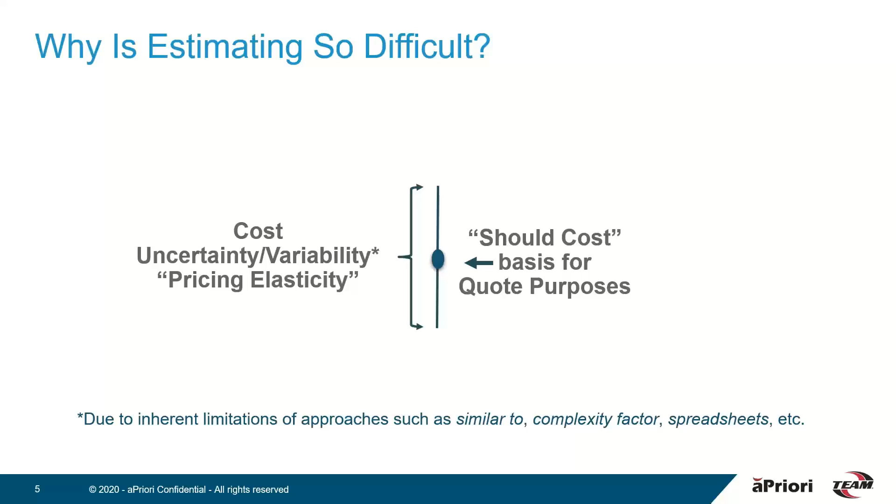So it leaves this band, if you will, of the range for an estimate. And there's a narrow window between pricing it and ending up in a situation where you're not profitable, or overpricing and not being competitive.

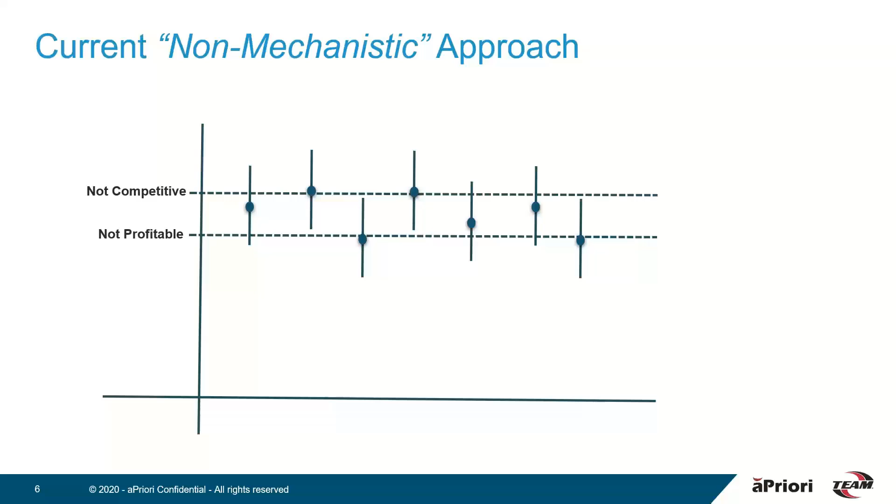You really want to be in that middle band where you're not overpricing and losing the business because somebody else is more competitive. So the reality is oftentimes many suppliers will err on the side of caution and go on the higher side in terms of their bids, to make sure the business they win, they'll actually achieve the margins with and won't lose any money on those.

Worst case scenario is that you're on the other side, and hopefully this doesn't happen often, but you're underpricing and not really fully understanding what you're getting into and what your costs will be, and you're pricing your projects too low. You might be winning the business, but it's bad business.

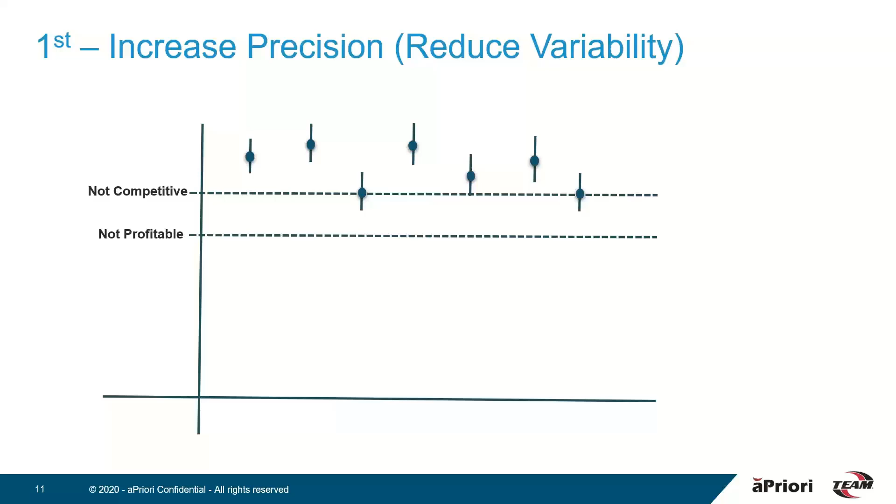So how can this be addressed? One of the things that can be done is to increase the precision, reduce the variability between the different estimators, and really narrow that band so that you can hone in on the right RFQ price. The next thing you can do is eliminate the variability and improve the consistency so that no matter who is doing the estimate, all of the manufacturing factors are being taken into consideration and the same results are generated from estimator to estimator.

And lastly, we can put this in the range where we're pricing at a competitive price, yet achieving the margin. We know that we're going to make the expected margin because we're pricing it in the right range here. So ultimately, we can get into a situation where we're bidding very competitively against the others that are available.

We're increasing our win rate because we're quicker. So if we employ a method of responding at a much greater speed, we can be first in and potentially win more business, especially with a competitive price, and make sure that we have a predictable and ultimately evolve the profit margin with competitive bid packages.

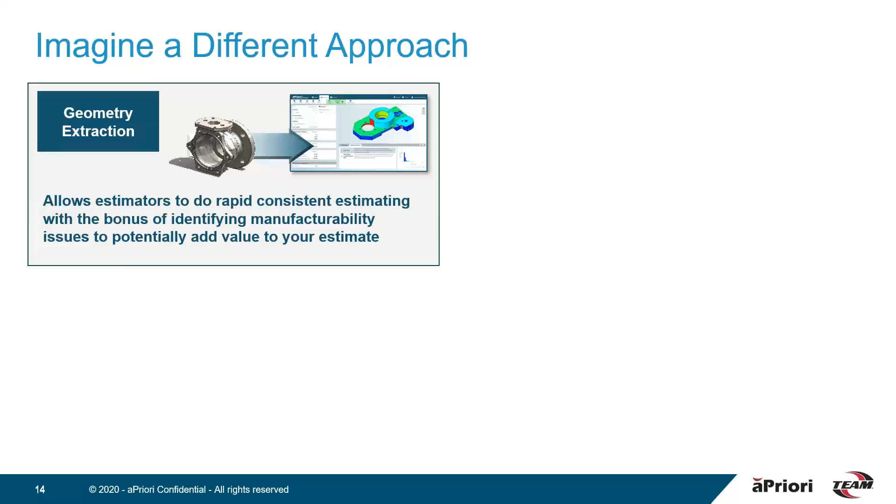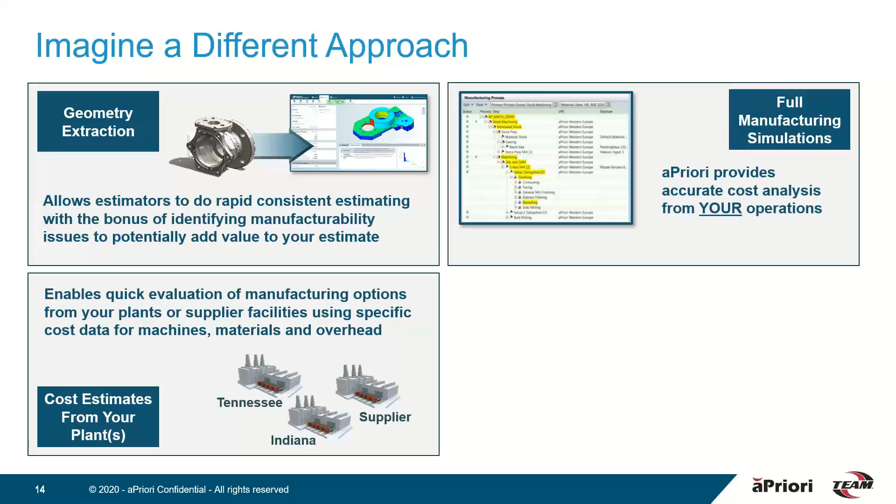So an approach to do this is what we'll review today, where we look at pulling information directly from the CAD models in the bid package to perform an estimate, understand the manufacturability requirements, and ultimately estimate the costs based on your digital factory and your operations and all of your factors that go into really pulling that together in a timely manner. Understanding your digital factory, the capabilities that you have, your specific materials, machines, and rates can all be factored in, and doing so in a collaborative way.

Making sure that everybody in the loop has the visibility to the different pieces that go into the overall RFQ and can contribute and ensure that everybody is on the same page. And this extends out to the customers themselves as well.

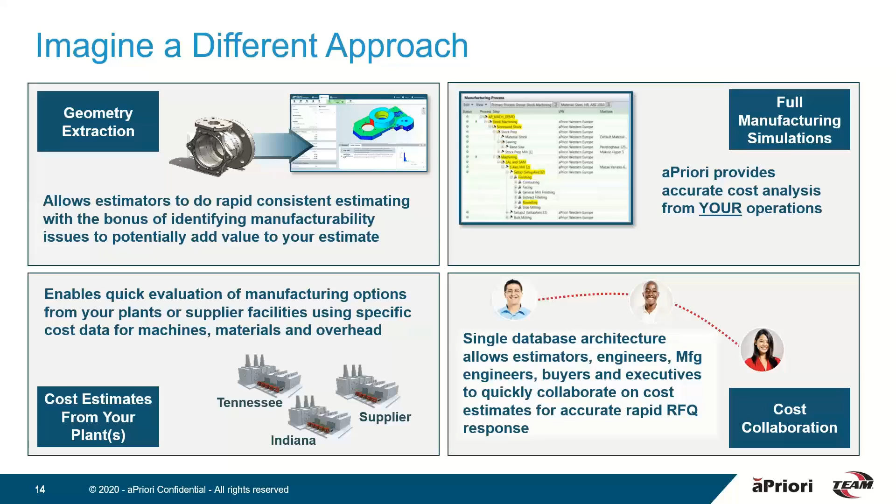So at this point, let's launch a poll and look at what percentage of incoming RFQs you choose not to bid, whether due to time and effort, capabilities, or even capacity.

Nick, do you want to talk a little bit about jobs that you potentially pass on? So every company, of course, does no-quote something. Typically, though, team vets our customers, and we develop deeper relationships with our customers. So by and large, if it's something that you need and you're a good customer, we try very, very hard to be a good supplier. So we'll give it our best shot to try to quote everything that you need. Some stuff we'll agree probably isn't a good fit, but we do our level best to provide solutions for you in every case.

And it looks like in many cases here, based on initial results, in 50% of the cases, 5 to 20% are not responded to. So it's pretty interesting.

So let's go ahead and move to taking a look at the solution. We'll run through an example here where we can look at quickly responding to a bid package and also introducing capabilities for collaboration. All right, so I'm going to log in to a cloud-based solution.

So the aPriori solution, which consists of a variety of role-based solutions to support the overall bidding process, manufacturing simulation, and costing effort. So we're going to start in aPriori Professional and take a look at this example of a TV mount. This is actually for a decent-sized 70-inch TV that a contract manufacturer is sending off to a supplier.

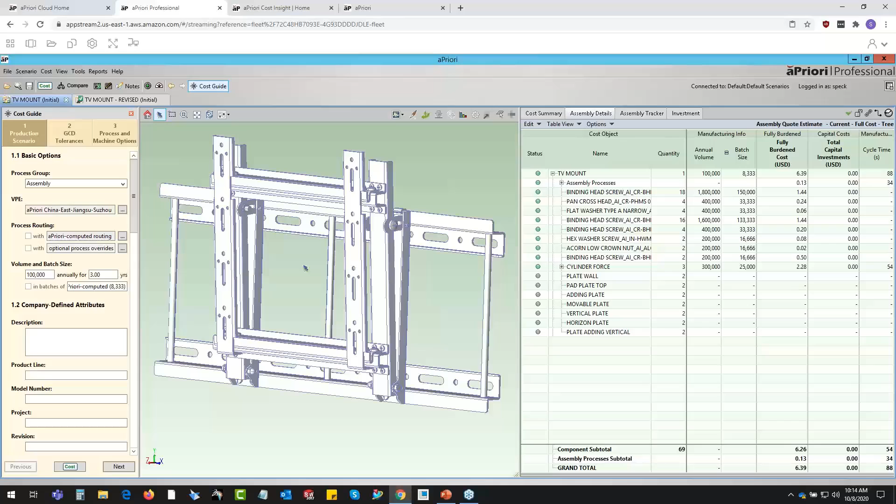So this was brought in directly from the NX CAD system, where the assembly is recognized, the hierarchy, all of the components have been identified. What we want to do is actually go through a process of very quickly estimating these parts.

So we'll kick off an approach to bulk cost the components in this assembly. We'll point to the directory where all of those CAD models live. This is going to be for the sheet metal components of this overall assembly.

We can see the directory that contains all the CAD models, as well as some details about annual volumes that are captured in a spreadsheet. So that is an automated approach to quickly process a whole host of components in an approach that simply runs in the background.

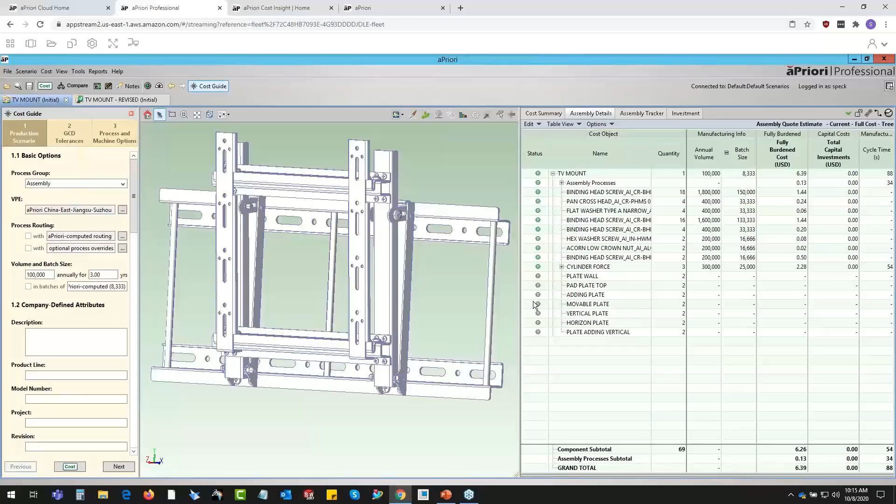I'll kick that off, and we'll look at an interactive approach on a part-by-part basis to estimate a component. We'll take a look at this clip at the top of the bracket. Its purpose is to allow for a 15-degree tilt of the bracket attached to the TV, and also to hang it initially from an installation standpoint. It's just a small sheet metal component.

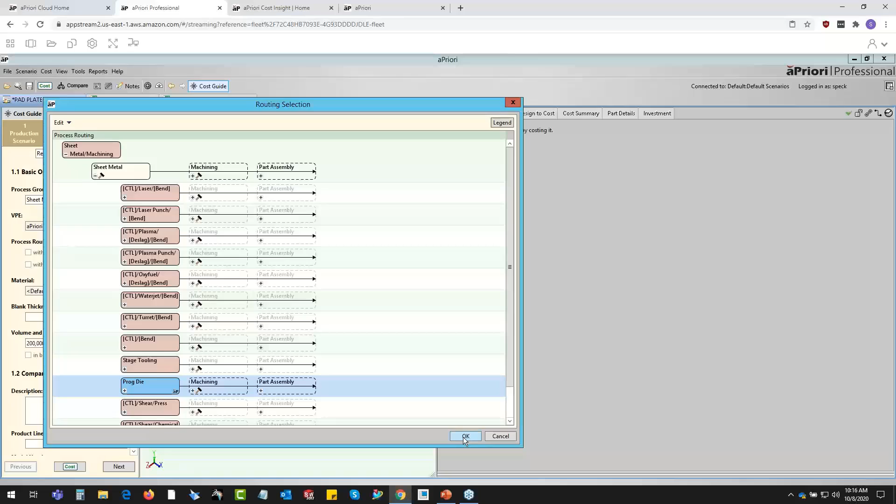We'll go ahead and open that up while the processing is happening in the background. This is a sheet metal component being manufactured at a digital factory in Suzhou, China. We have a variety of manufacturing processes that could be used to build this component. Is it laser cut and then bent? Is it done on the turret? I know that this one here, based on the volume, is going to run on a progressive die, and there's going to be 200,000 of these parts for 3 years.

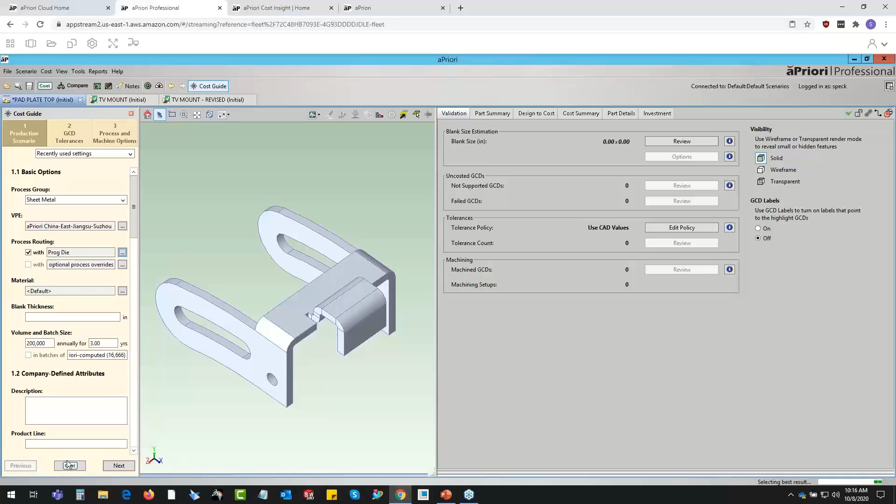So the cost and manufacturing simulation gets kicked off by first understanding the geometry of the component, and then simulating the manufacturing process in each step along the way. That takes a few seconds to complete, and we quickly return some results here. This part is a 63-cent fully burdened cost component with $17,000 worth of tooling.

Looks like I have a pop-up here in the background that indicates the other components in that directory have all completed their simulation. We'll just dismiss that and take a look here for just a minute.

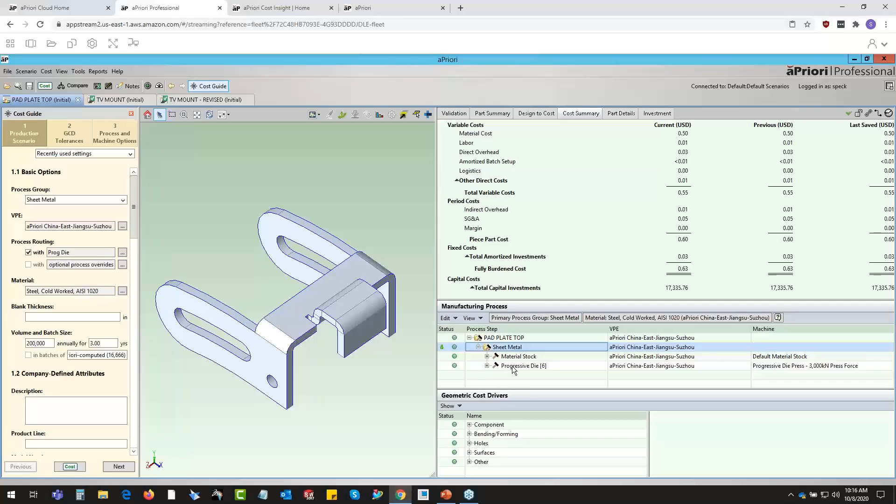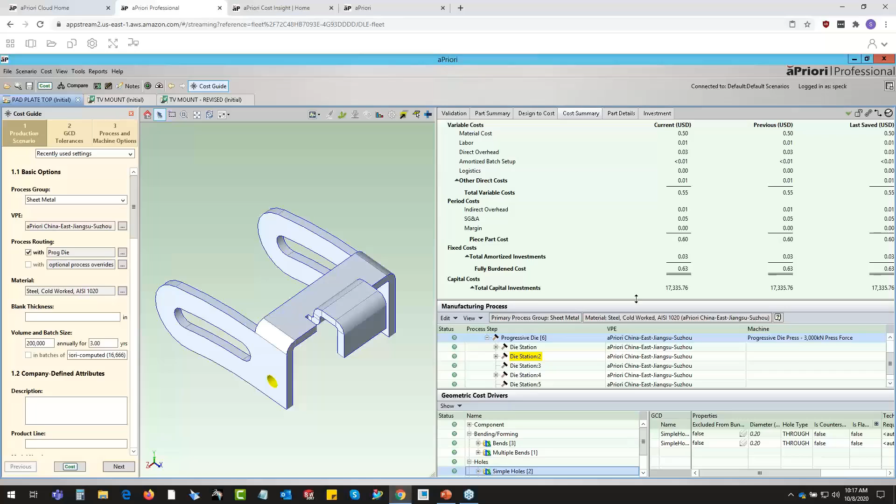So what's happened in the background is the manufacturing process has been simulated, and a progressive die with 6 stations has been chosen. That was determined based on a complete understanding of the geometry of the component. How many bends in the component? There's 3 bends, some simple holes. That's all factored in to determine what it will take to make that part, each of those features, and essentially the operations happening at the die stations.

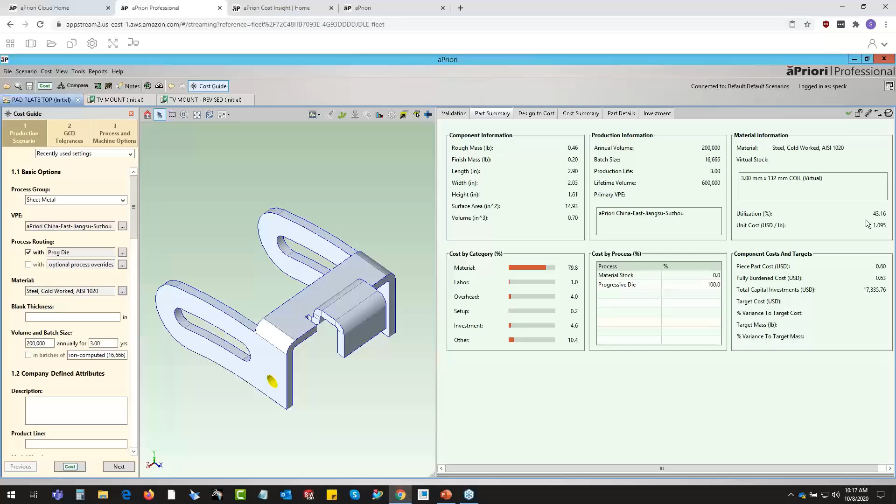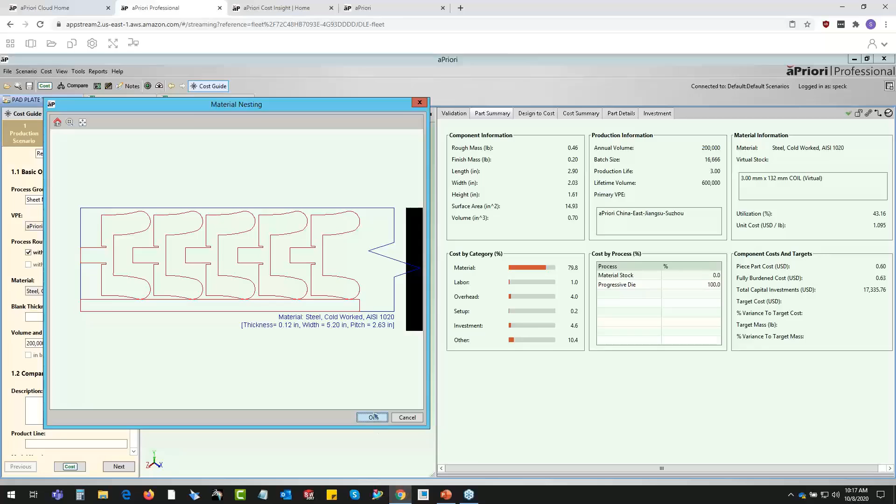Further investigation shows that the material is actually taking up 80% of the cost of this component. We can see the utilization over on the right here of 43%, so we're throwing away over half of the material in this part. That was arrived at by estimating the strip of material and then nesting the components on there. As we can see, it's the best you can get to align these components, but still some material is being thrown away. So with that said, let's jump back over to the assembly.

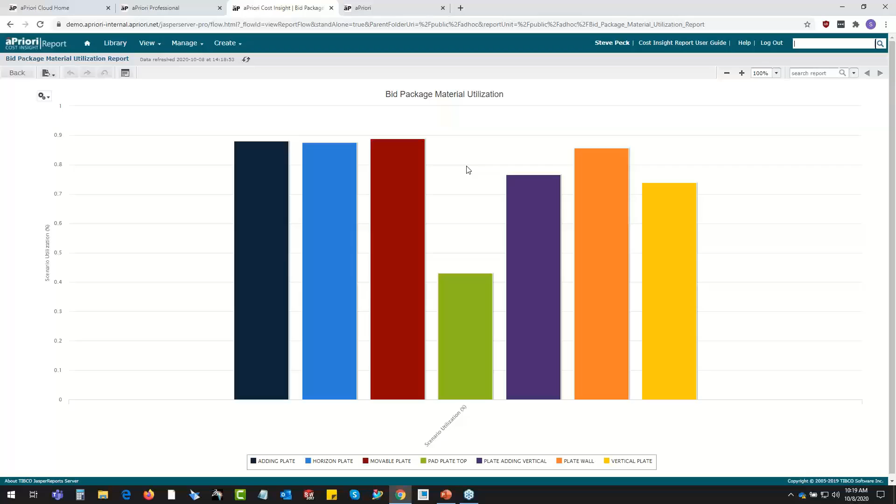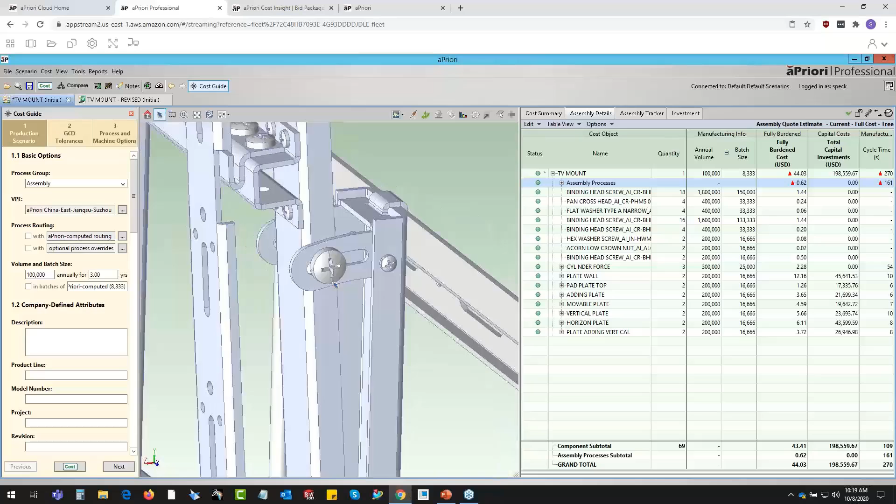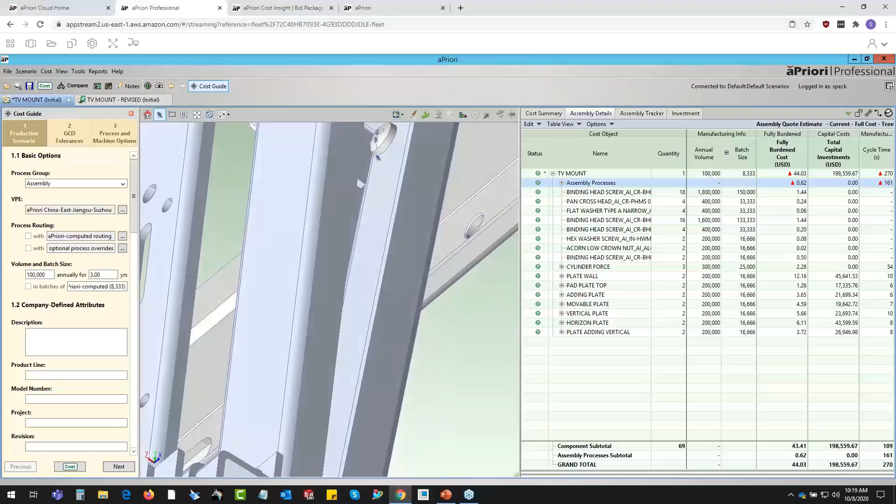So maybe there's a way of doing something to better optimize this material, so ultimately we're throwing less away. If we look at this component and its function, it's serving two purposes: hanging against the plate that goes against the wall, and also allowing for this 15-degree tilt on the component. But if I look at it, maybe does that really need to be a separate part? It's actually being fastened with 2 screws on each side, and then also to the back plate, which requires some through holes for clearance of those screws.

Maybe that function could be incorporated directly into this component here.

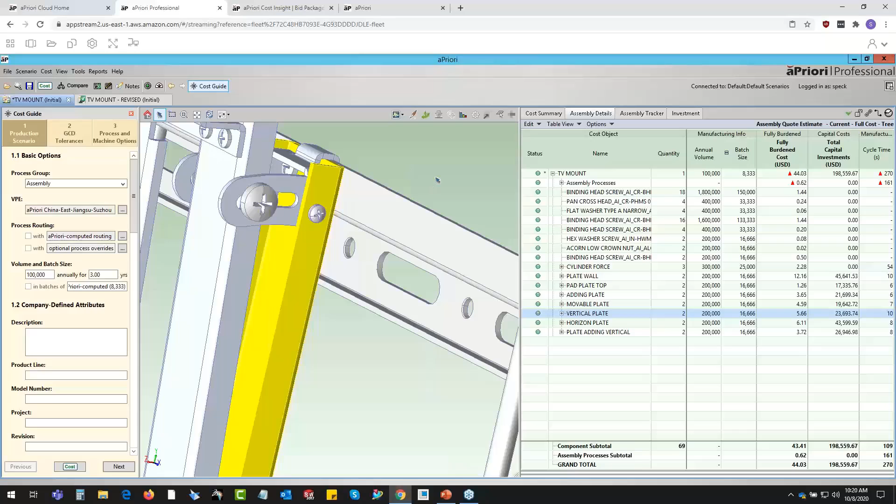So I can go and provide some potential options for the customer to have some value add rather than just taking what I'm giving and quoting it. Maybe there's an option to provide some DFM or design options that could ultimately benefit both of us and improve the product. So I went through that process of a little bit of CAD work, and I consolidated those 2 parts into this revised version.

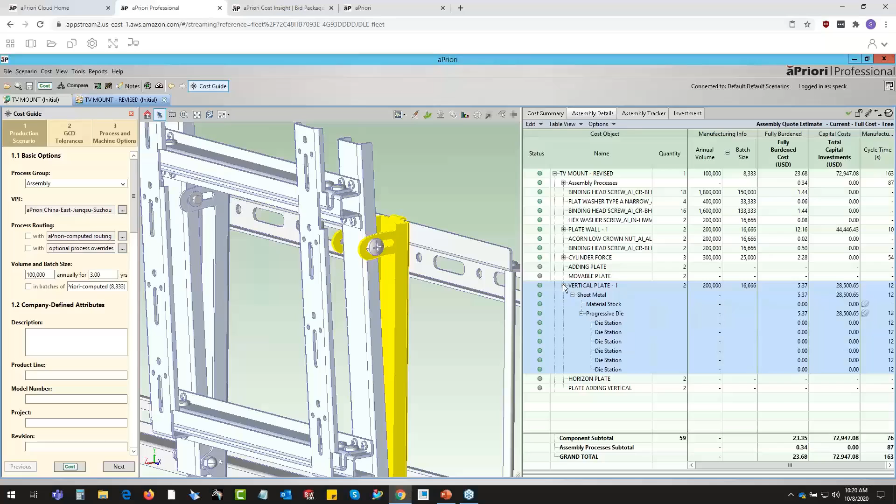So the feature to hang it is still preserved, as well as the ability to have that 15-degree tilt. I've gone from 2 components down to a single part performing the same function, and I've eliminated 4 fasteners per side on this. So let's take a look at the result and go ahead and update our costing based on that change.

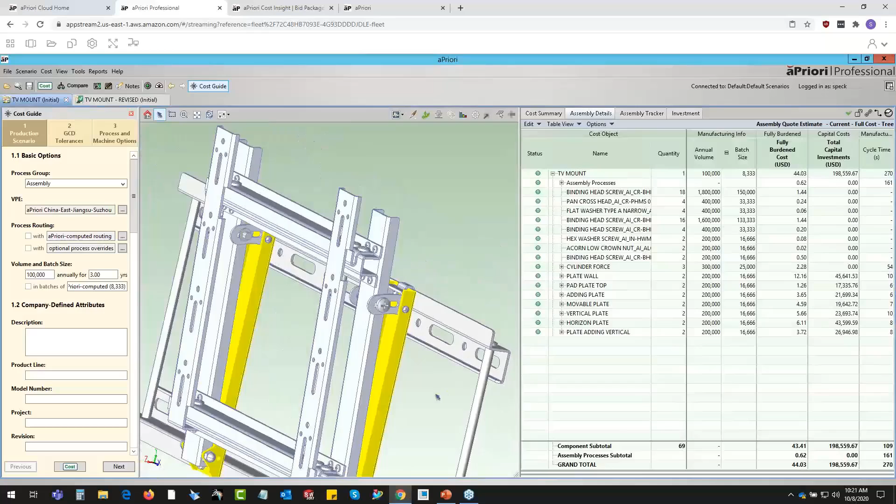So what we see here is that based on the revised approach, we have an updated cost. Originally, for the initial design, this was $44.03 for the total cost, summing up the individual components and hardware of that entire assembly. In the revised version, we have a final cost of $41.99 for the total assembly.

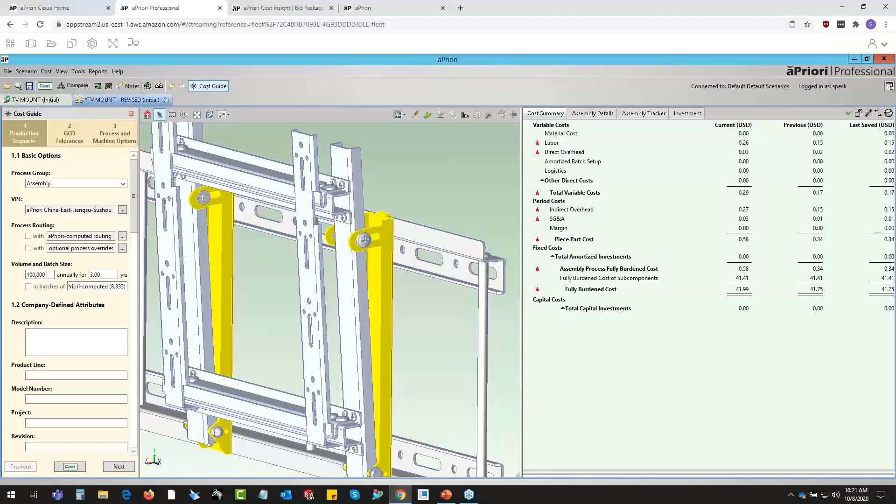So it doesn't seem like a big difference, but it's actually $2 over 100,000 components annually for 3 years. So we're looking at $200,000 per year, well over $600,000 here, potential savings based on such a little change like this. This could now be communicated back to the customer.

So I actually could attach some notes here and provide this feedback: based on some material utilization concerns, we looked at a potential way to reduce part count, lower the overall cost, and still maintain the function. Maybe it's something worth looking at. We have a potential of $204,000 in savings. What do you think of that?

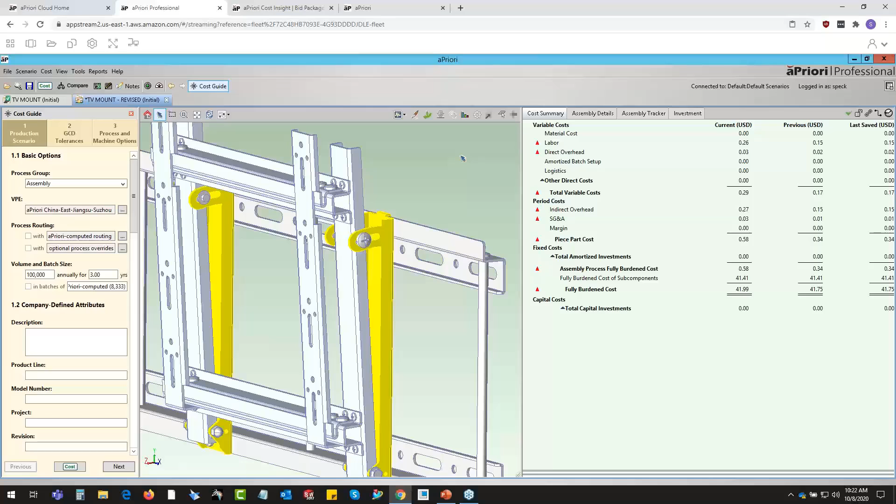So as a supplier, I can provide this added value, if you will. Now this could be shared via a report with the customer directly, or what we might be able to do is provide them access to directly log in to the cloud-based environment where they can see firsthand the changes that were made and interact with this with their supplier, really having transparency on cost.

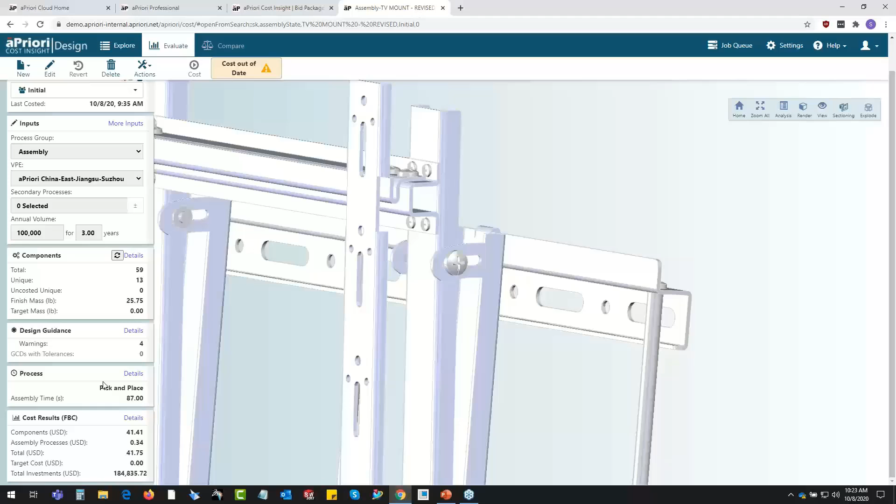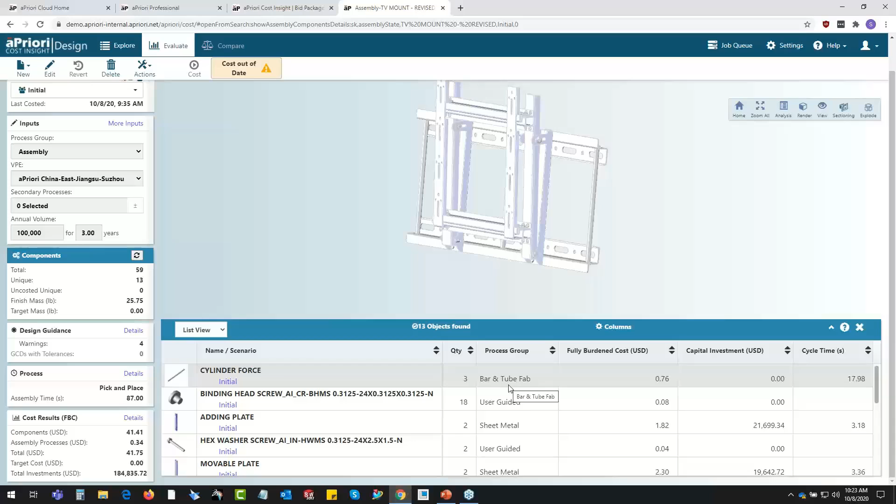And ultimately be able to understand and share the details of manufacturing. In some cases, we have manufacturers we work with that have gone fully open book and are simply agreeing on margin. So here we can review this entire assembly, take a look at the notes shared from the supplier based on these potential changes, and ultimately dig into the details of all these components within the assembly, seeing the estimated cost and full visibility into each component.

If we want to dive deeper into this component where there is that suggested change, we can go ahead and review that part directly and get a better understanding. Okay, is this really going to function? This design change here looks okay, but let's take a deeper look at this particular component.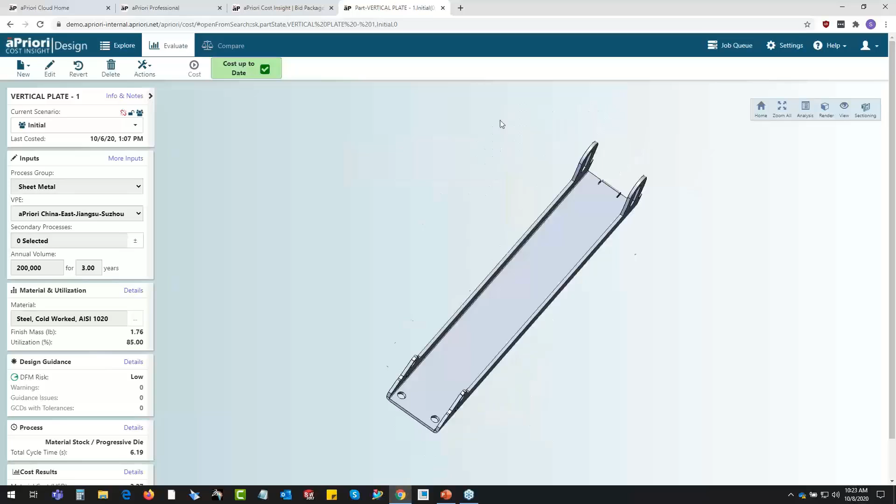We can go in, looks pretty straightforward. There's no design guidance or DFM issues that have been flagged. If there were problems where it was redesigned and maybe there are holes too close to an edge or bend radii that are too tight, none of that's flagged. It would be flagged if there were some manufacturing issues here.

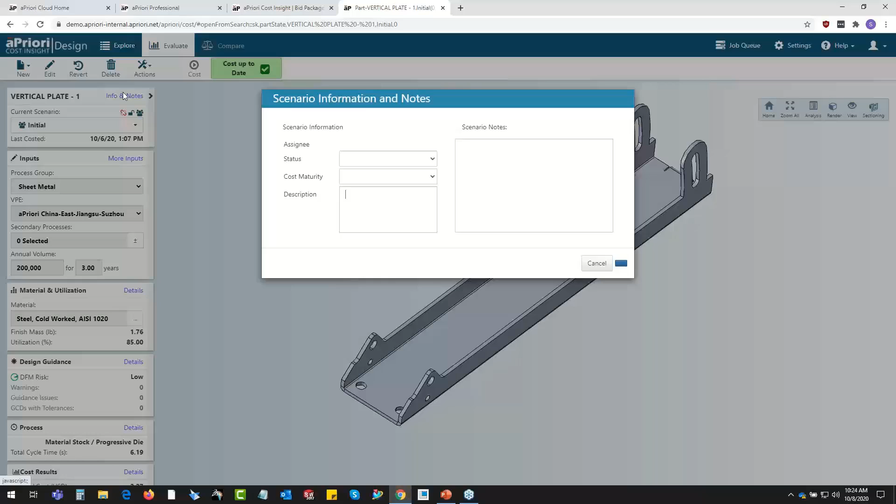So at this point, we've got a pretty good potential design change here that could save everybody money. Now it's okay, what do we do with that $200,000, right? We're going to be able to potentially both benefit from that. So assuming that all went through fine, now as the supplier, we can take a look at the next phase.

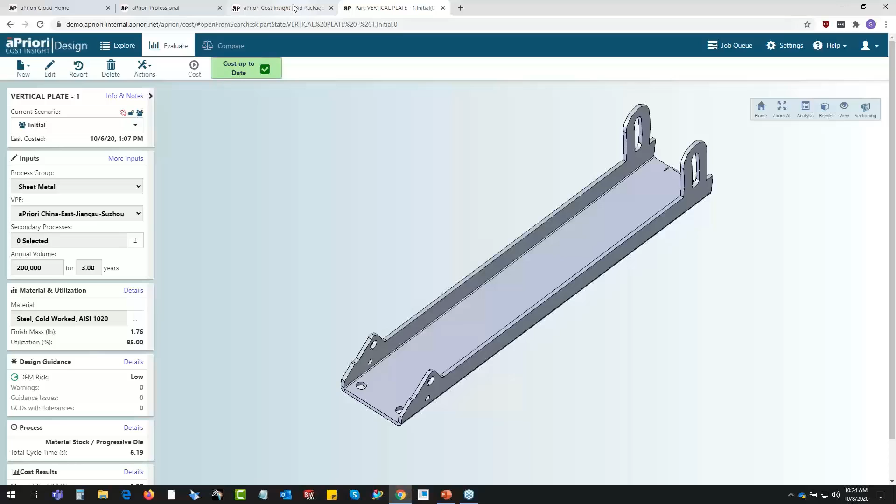Okay, we've looked at the manufacturing process, really trying to get an understanding of what it's going to take to deliver based on these requirements. And here I can take a look at a way to support the manufacturing engineers and give them what they need. So through the simulation, a full understanding of the manufacturing process was analyzed, including the time required.

I might have been bidding a package that had some components that I don't even have the manufacturing capacity or capability to build, and we potentially would need to outsource. We could then work with those sub-suppliers to really understand what their portion of the quote should be, so I don't have to wait for those to be returned.

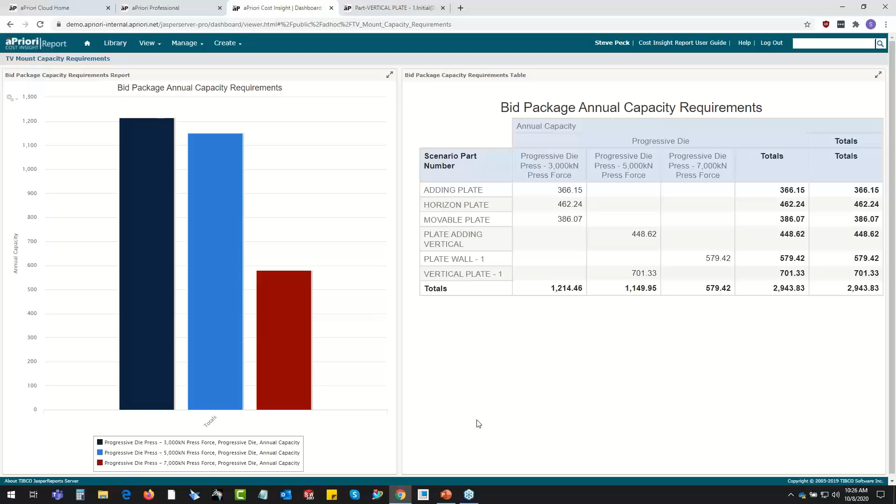I can analyze that, and then when it does come time to working with them, have the data necessary to support a negotiation. So just wanted to provide a little overview and a glimpse into the solution and how it could be applied to very quickly respond to RFQs, simulated based on your factory capabilities, getting results that you can trust because it is based on your manufacturing process, and ultimately enabling collaboration internally and with your customers to help make better business decisions and improve your position as a supplier with your customers.

I want to turn it over to Nick, and based on the demonstration that we just saw in the technology and how it's been applied, listen to Nick at Team Industries and how they apply the technology within their organization to help them be a more strategic supplier to their customers.

Very good. Thank you, Steve. That was an excellent presentation. I really appreciate you highlighting the depth of knowledge and process that aPriori provides. It's not just a simple click a button and get an answer. It's very in-depth. It gives the entire process, and it's something that you can take to the bank, as it were. So we appreciate that.

So to get started, hello everybody. Thank you for tuning in. It is a great honor to be able to talk to you all today and explain Team Industries and how we do business, how we're using aPriori software to improve the quoting process and to get you your numbers back faster and more accurately.

We entitled the presentation a request for collaboration because we have found that the very best solutions that we're able to provide aren't just an answer. We don't do our best work, you don't get your best solution, if you're just asking for an answer. So we'll show you how this works.

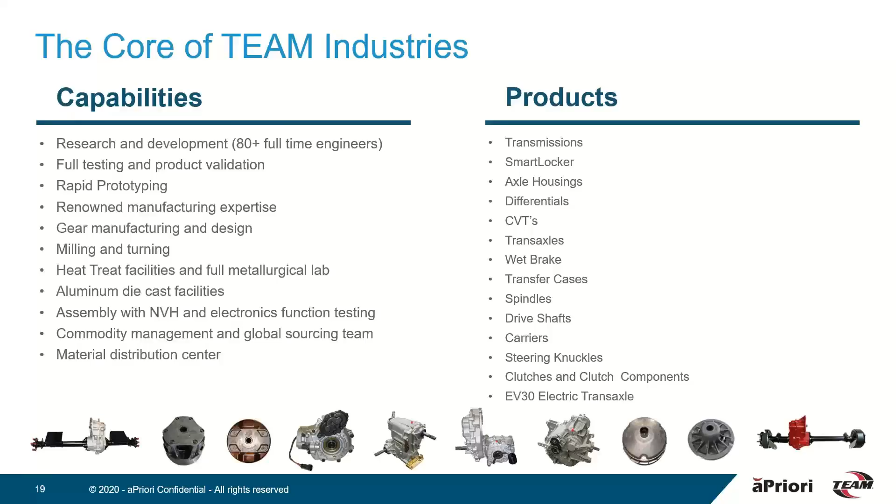Some of the products that we've made, of course, clutches, transmissions. We have some electronic actuators now. We love what we do. We've been doing it for a very long time. But really, Team's core competency is that we are a solutions provider. We don't just make a part. What we do is we engineer a solution for you that helps you be most successful. And it might not be the thing you started out with or thought you needed to begin with. And that's really the core of this presentation.

In order to do that and be successful, Team needs plants, of course. So we've got many manufacturing facilities around the nation. We've got some in northern Minnesota, some in the Carolinas, and some in Mexico. We employ over 1,000 people, and we all work hard to make sure that your products make it out the door on time and with the standards that you need.

You can still meet your budget requirements, and you won't realize halfway along the way that you're no longer profitable. The project is in terrible trouble at other deadlines, or you have to figure out how to make up the gap somewhere. It's very frustrating. We hire experts. We call these people estimators, and those estimators provide quotes. The thing is we don't know if those estimators really know the best way through. They know a way through, and they do provide an answer, but we don't know that it's the best answer. It's just the one that they give us.

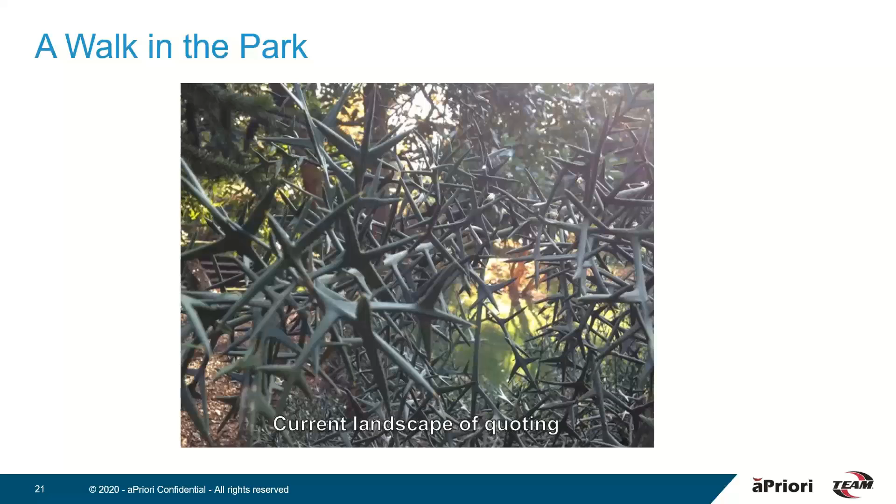The world is such now, and the competition is so great, that we really cannot accept the risk of not collaborating. We need to know what you need, and we need to be able to deliver for you. So in order to best explain how the quoting process can work in a very efficient way, we've created a fictitious part.

This part is about as simple as it gets. There's a 2.5-inch diameter roller, it's 1 inch thick, and there's a 1/2-inch hole in it. The reason we created such a simple part is because it's really important to understand the power of collaboration and the ability of the software to do a deep analysis and provide the best cost solution for our customers and for us as a supplier.

At the end of the day, bringing your product to market is really what's going to make both of us money. If it's wildly expensive, you're not going to get to market, and we're not going to produce your part. So what we did is we created this part, and this was based on a part that was showcased in last year's aPriori user conference. It's used in the ag market, and they provided a price for this part of near $50.

So using the software, we costed this out, and I set the annual usage and batch size to a number that produced a $50 starting point. It's a simple part, made out of 1010 steel, nothing fancy. And so we're starting out at $50.

Now put yourself in the mindset of the customer, or of the OEM. We've made this part, we have prototype parts, and now we want to go to production. So we would go to my supplier and say, supplier, what can you do to drive cost out of this part? Because $50 per part is probably a little bit much given its complexity and weight.

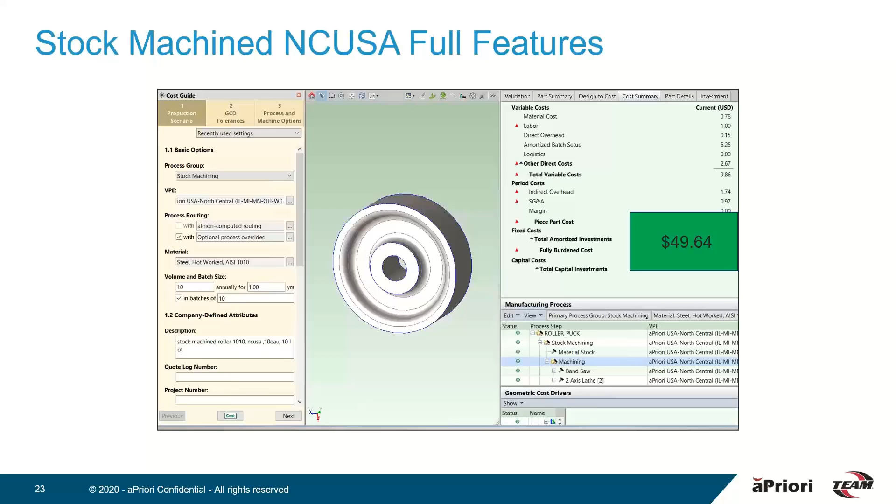We take this part. As I said, this part right now is $49.64. So once we reduce complexity of it, we took the trepanning out. Now it really is as simple as it possibly can be. It can't be simpler and still work. And in fact, some may argue that it's too simple and looks cheap. And if the assembly costs thousands of dollars, we don't know that we want a part that looks cheap.

But you see that the cost result of this is only a few cents. We only saved about 30 cents taking the trepanning out of this.

And at this point, this is where most customer-supplier relationships begin to break down. From the customer's perspective, I made the part as simple as I possibly could, and you're telling me I only saved 30 cents? That's ridiculous. Why can't it cost me less? Why won't you? I think you're robbing me.

And from the supplier's perspective, it costs what it costs. I would love to be able to charge you less, but honestly, volumes are dictating that it is what it is, and there are setup charges. I have to feed my people. I can't decide who I'm not going to pay today, I'm sorry, supplier or customer. I would love to charge you less, but I can't.

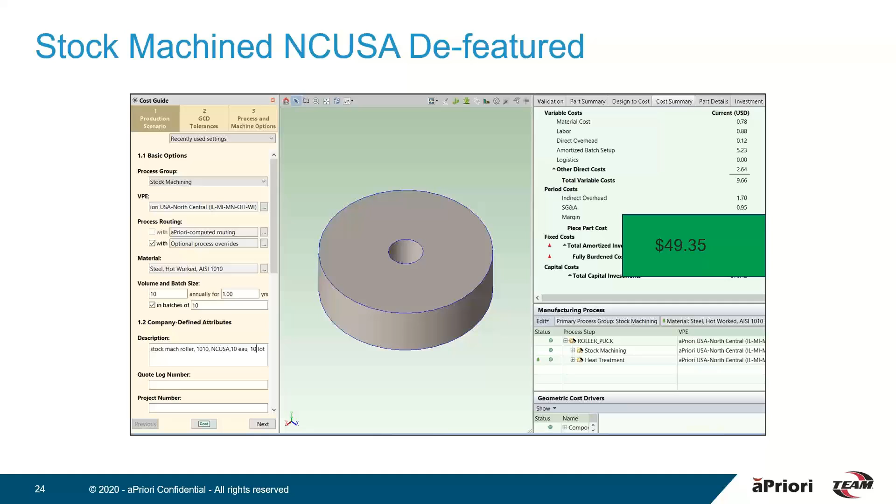So we would hope, honestly, at this point, you would call a company like us, where we're able to collaborate with you directly, show you how we're going to drive costs out of this assembly, out of this part, and get you a cost solution that works for you, that is cost effective for the project.

So I used aPriori then to cost this part out and made a couple of changes. First of all, you're going to production, so we'll set a batch of 1,000 pieces. And in order to make sure that you're not getting your assembly lines flooded with too many parts, we're going to set a delivery, or EAU, of 1,000 and a batch of 50. The material is still the same, and we want you to get the part that you want, so we put all the extra features, trepanning, and things like that back in.

Now, if we look over at our costs, we see that it's dropped down to $4.72. That's a huge savings. We went from $50 to $4.72. But that really isn't the end of the story. Just because you found a price doesn't necessarily mean it's the lowest price. So you would ask us to do further investigation to see if we're globally competitive, and we would continue to do that for you.

The next question we would ask you is, is the volume going to go up? So if it did, we set a volume at 10,000 pieces annual, and batch sizes of 2,500. Well, that drives the cost down to $3.24, which is really a long ways from $50.

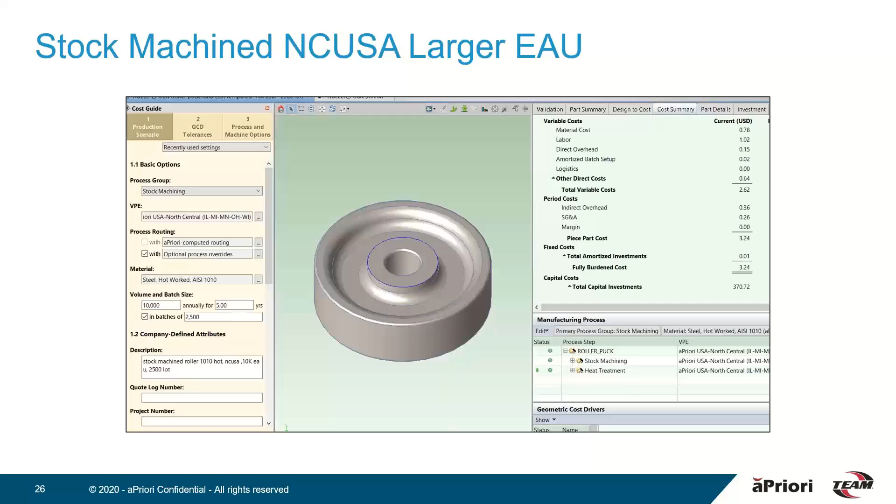But the question always comes, can I get this cheaper somewhere else? And we can answer that question. So we run the same part with the same basic setup, 4140 steel, volume batch size 10,000, 2,500 piece lot, and we run this as a forging in Taiwan, because we ran it as a forging in America. We find that, in fact, it is not cheaper to source this part overseas. In Taiwan, you could get this part for $4.43, $3.98 in China, and still $3.24 in America.

That's rather astounding to a lot of companies, because the idea of sourcing a part that we thought was $50 overseas and now costs $4 sounds like a great deal. But really, especially in a COVID environment where supply chains are disrupted and people are having a hard time getting the same stuff they've gotten forever due to the virus, staying at home reduces risk, and it reduces the need to put more costs into it in the form of margins.

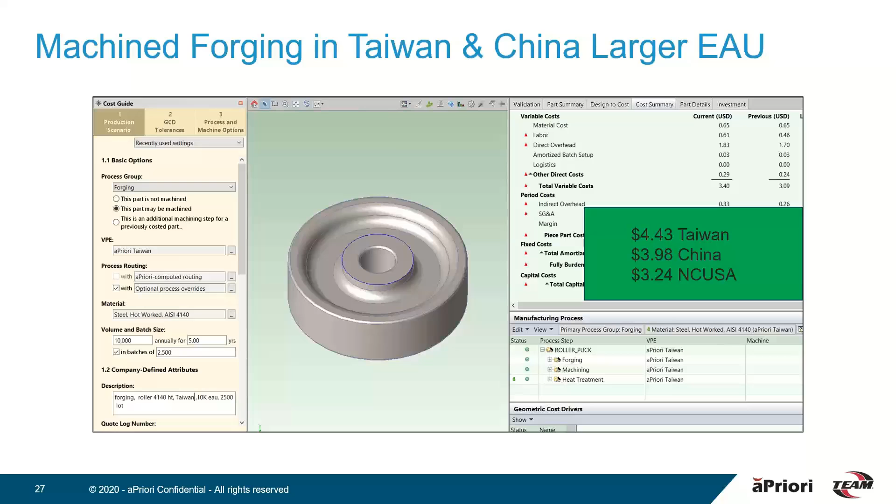I should also point out that these are just should-costs. There is not margin built into my numbers. And as Steve pointed out, some companies have realized that the last thing to really negotiate on is margin, because everybody who has this software is going to be able to see what the should-cost is. They're going to be able to see a clear process, know exactly what goes into it, exactly how much the materials should be, what the labor should be, what the logistics should be. At the end of the day, it really all comes down to risk, and risk gets mitigated by margin. So every part has a unique margin, and margin is really what the negotiating piece is going to be in the future.

But we're not done yet. Team has a global sourcing team. We've got, I would say, 10 people who are completely dedicated to finding your parts and finding them at the best cost globally and getting you the right answer. And that might not be in America. So if we do our due diligence, we find that if we find this same forged part that we would have sourced in China or in the United States, we can get it out of Mexico for $1.38. And that's fantastic. That's when people really start to get excited that a sourcing solution for this one is probably a good idea.

Companies who work closely and collaborate with their suppliers can stand to do very well. But that isn't the end of the story either. If you really work intently with our engineers and we have a good working relationship, it can be found that a part like this actually can be made more simply and more cost effectively.

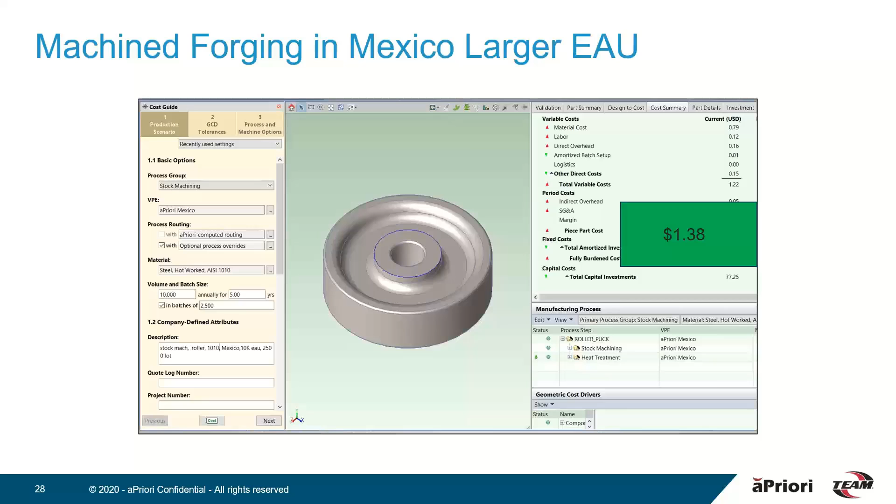If we were to bring it to our engineers, they may find that instead of it needing to be 1010 steel, we could do a ductile iron, austempered ductile iron, 80 grade ductile or something like that, and machine that in Mexico. So we run that analysis and we find that this part is 77 cents, which is fantastic. We went from a $50 part that was the proto part to a full production, full run at 77 cents each. And that can win a project.

It can make sure that your projects overall are successful. If you are having a difficult time meeting your budget constraints on other parts that are very complex, perhaps we took enough money out of it to make you successful and make your project come to market.

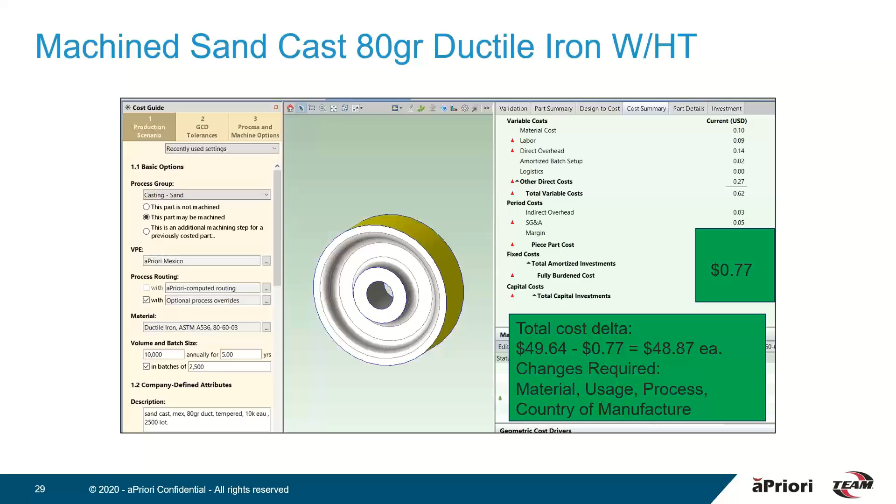So the total cost delta on this is $48.87, and it looks like this. We started out at $49.64. Through volume increases and design changes, we found that it was not cheaper to source it overseas. We also found that if we change the process and change materials through good engineering and good collaboration between customer and supplier, we can find you a very, very cost-effective part.

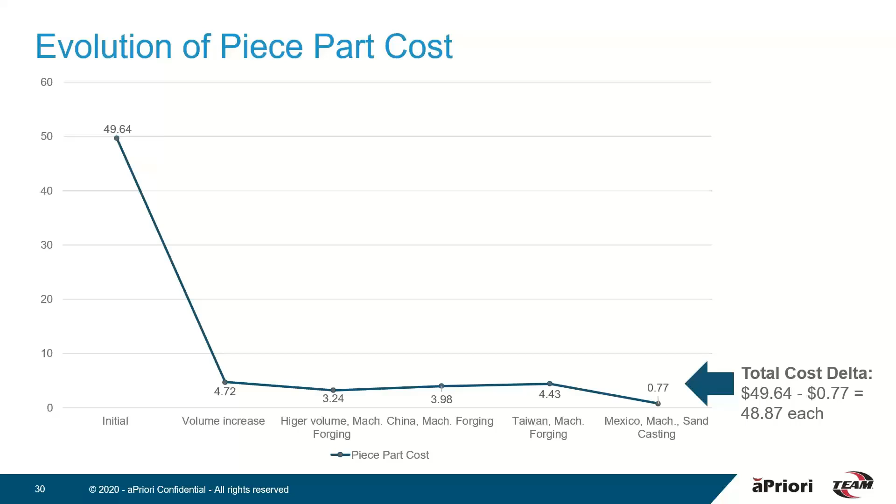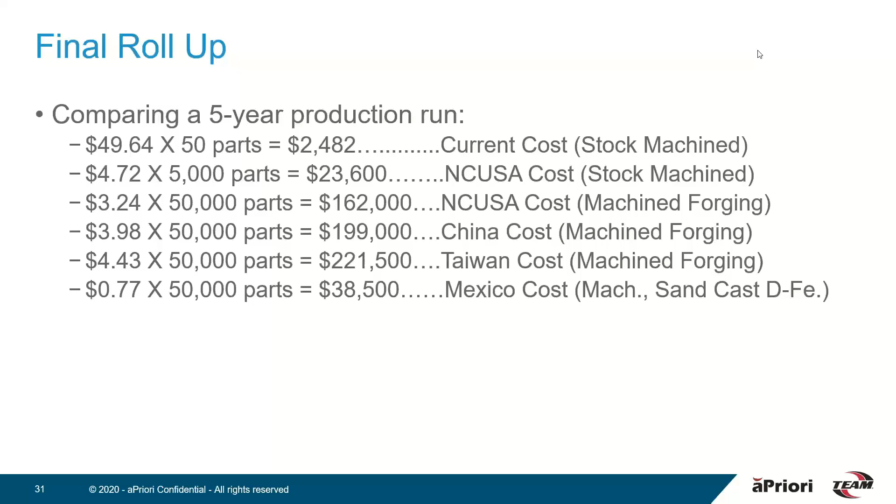Understanding the whole picture, getting the whole picture because aPriori provides it, and because your customer and your supplier are working together to find these numbers together, is what's going to make you the most money. That's what the team would like to put out there, that we are a solutions provider. We would love to help you. If it's something that you would want to call us on, we'd be very happy to take a look at what you have and try to find a solution with you.

To give you an idea of what it took to do this and the further impact and cost savings of aPriori, I started designing this simple part at 10 a.m. Within a matter of hours, I had run over 64 different iterations of costs on them. So the numbers you see are the boiled down numbers. Every scenario had all of the material types and all the volumes and everything cooked into it, but it only took me a few hours to get that.

Now, under normal circumstances, it would take 4 departments 2 to 4 weeks to get any quote back on a single part and a single scenario. If you were to ask any supplier for 64 different variations of a single quote, they would probably quit talking to you. Worse, if you did all that work for them and then didn't end up using them as a supplier, they'd probably never talk to you again.

But the software makes this really simple. And as Steve pointed out and gave the demonstration there, it's very, very fast to get the information, and the bulk costing capabilities are built into the online software. So what I did in a few hours is actually being automated and can be done much, much more quickly. There will still be the requirement for an engineer to look through the data and make sure everything feels right and looks right. But we are in a new age of quoting, and it's really quoting through collaboration.